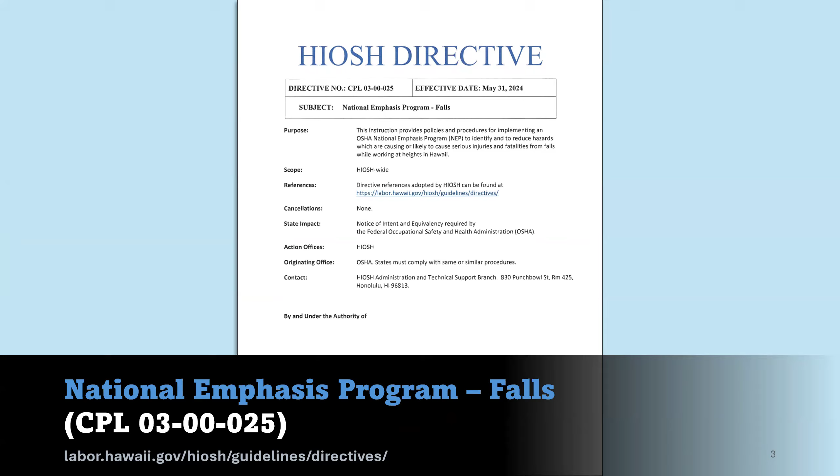Welcome to the Fall Prevention Fundamentals for General Industry and Construction. This presentation is provided under the authority of Section

396-4C of the Hawaii Revised Statutes, which authorizes our division to disseminate educational information to employers, employees, and the general public. Through lectures, exhibitions, and other forms of public outreach, we aim to raise awareness about the causes and prevention of workplace accidents and injuries.

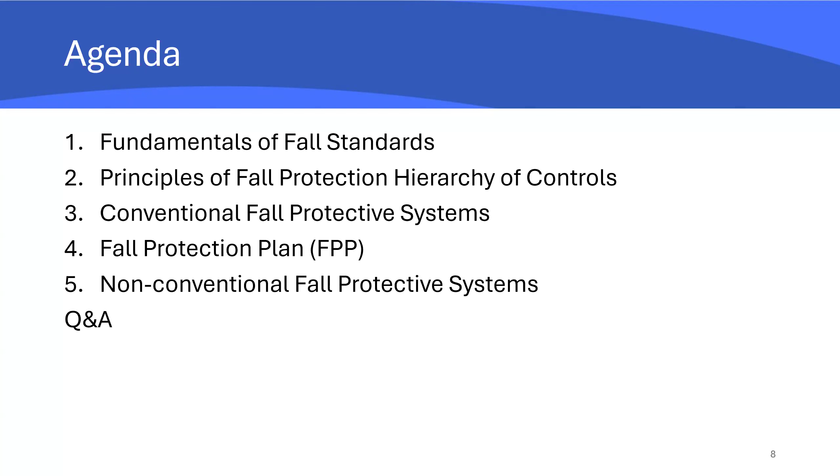Then we'll examine the non-conventional fall protection systems, focusing on when they may be used, what controls are needed, and how they fit into the overall strategies for managing fall hazards. Then a short Q&A at the end.

This presentation is designed with accessibility at its core, so my goal is to ensure that every participant, regardless of ability or background, can fully engage with the information being shared.

To support this commitment, I want to note in advance that I will occasionally read directly from the slides, and this is intentional, as some members of our audience may experience challenges with reading, vision, or other literacy related barriers. By voicing the content, we help create a more inclusive environment where everyone can follow along.

It's only when we can strengthen our community by supporting the people who struggle the most. Real progress begins when we notice who's being left out and make sure that they're included.

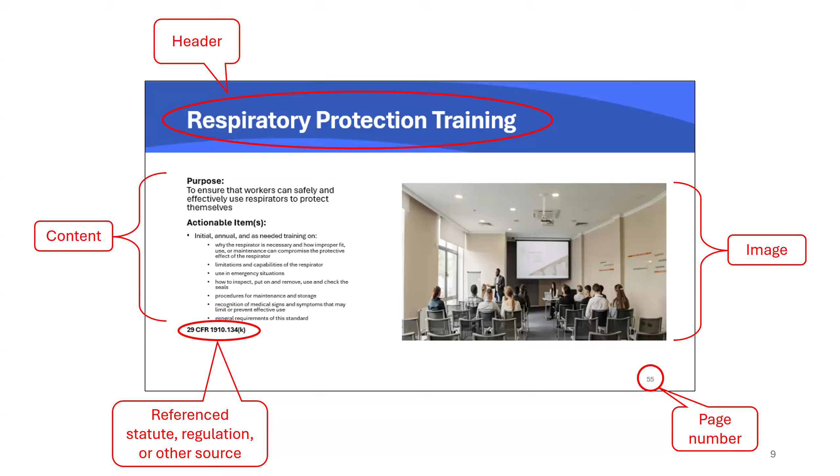Welcome to the fall fundamentals of fall standards. The remainder of this presentation builds on the employer's established training and procedures for protecting workers. Much of what follows should be familiar to those who practice this, but the goal is to reinforce the practices and expectations employers should already know and apply.

Are falls a problem? Absolutely. Across all industries, falls were the second leading cause of fatal workplace injuries. But in the construction industry, the picture is even more serious. Falls are the number one cause of worker deaths, meaning more construction workers lose their lives from falls than from any other type of incident. It's a clear signal that fall hazards remain one of the most critical safety challenges on job sites, and it underscores why strong fall protection practices, training, and planning are essential for keeping workers safe.

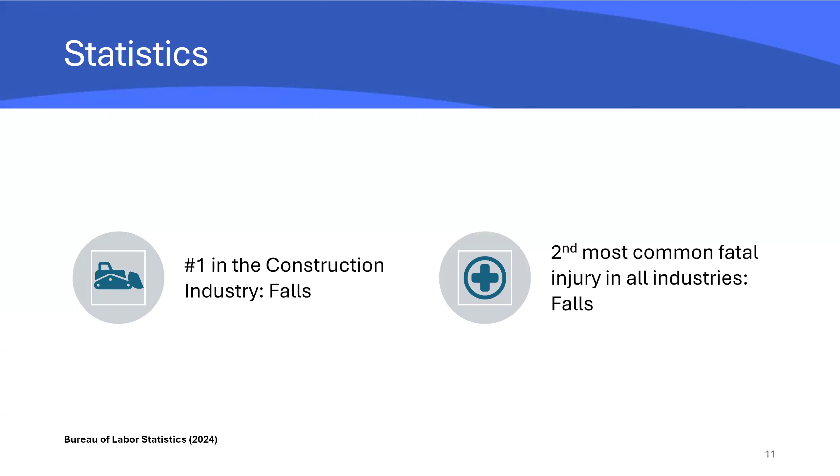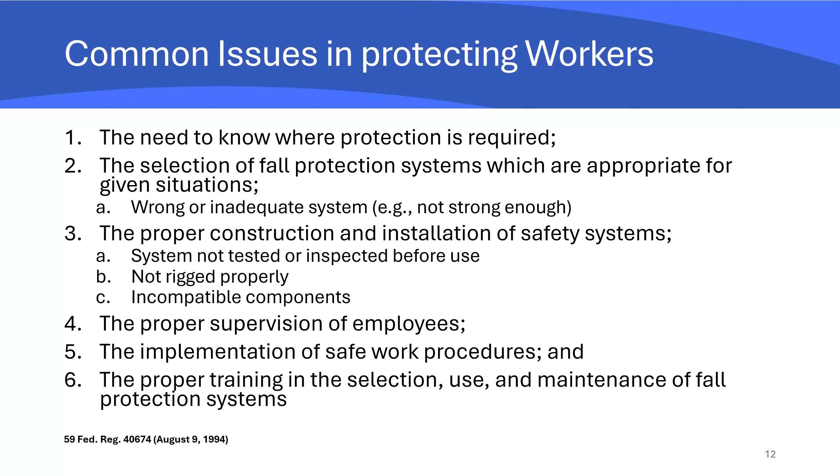Worker protection issues mostly came from human errors and equipment problems that created fall hazards, which the construction and general industry standards address. This includes where protection is needed to protect workers, how to select systems appropriate for situations, how to construct and install, how to properly supervise employees, how to implement safe work procedures, and training addressing the selection, use, and maintenance of the company's chosen systems. We're not able to address all of this within the hour, but I will address at least the first three.

These are the standards that address the common issues experienced by companies regarding fall protection, as I mentioned earlier. Notice the similarities in both standards, except for the personal fall protection systems detailed under section 1910.140 for general industry. There is a duty in both general industry and construction that examines where protection is required, and a selection process for fall protection systems. Criteria and practices address the proper construction and installation of the systems, as well as proper supervision. Finally, the proper training in the selection, use, and maintenance of fall protection systems is covered in the training requirements.

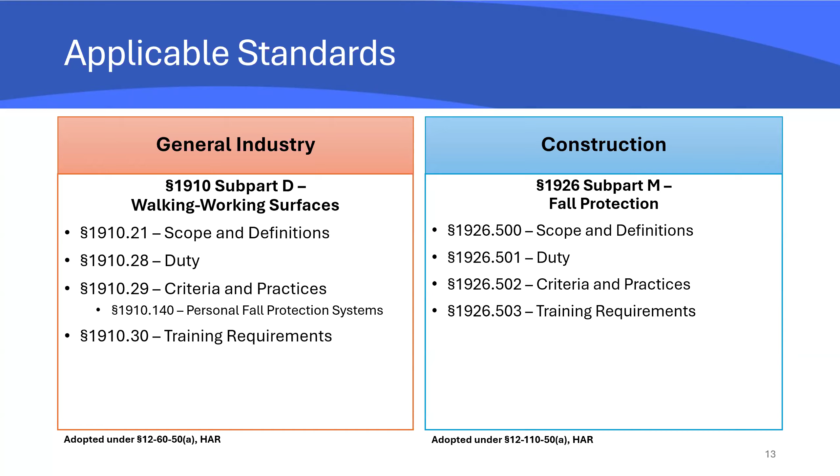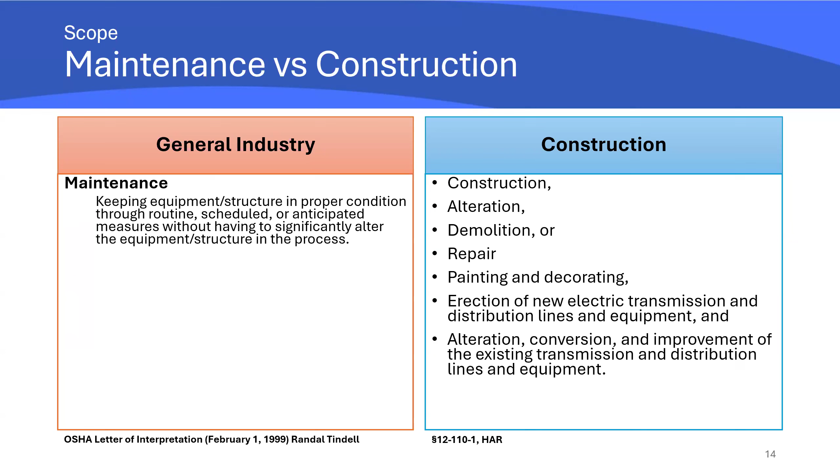Some tasks can fall under either general industry or construction, depending on what else is happening at the site. The simplest way to tell the difference is this: if the work improves or changes a structure or building, it's construction. If it preserves or keeps it in good condition, then it's maintenance and therefore falls under general industry.

As we talk about fall hazards, I'm referring to the threshold height that triggers the employer's obligation to provide fall protection. For general industry, it is 4 feet. For construction, it is 6 feet.

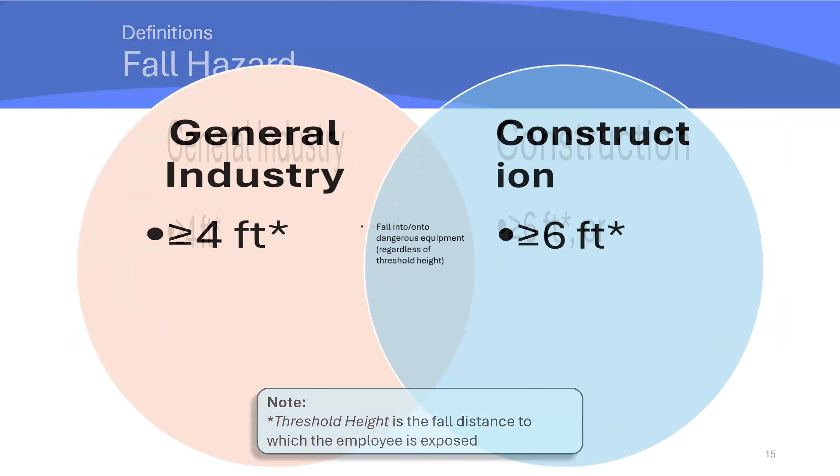The commonalities in the definition of fall hazard for general industry and construction include falling into or onto dangerous equipment, regardless of the threshold height. For example, that's like working 2 feet over machinery with open drive belts, pulleys, or gears, or open vats of degreasing agents or acid that can seriously burn an employee. So these are the things that we consider.

Both standards contain several exemptions. One I want to point out: in both standards, the exemption for fall protection systems applies to those performing inspections, investigations, or assessments before work begins or after all work is completed. Historically, insurance companies told OSHA during rulemaking that some tasks, like insurance inspectors, claims adjusters, and loss control personnel, should be exempt because requiring them to use fall protection systems would, one, increase risk by requiring them to carry and install equipment like rooftop anchors; two, prolong their exposure to fall hazards; and three, be infeasible when they cannot install anchors on buildings or structures they do not own, since those belong to their clientele. OSHA continues to agree with this rationale, as it reflects real-world inspection practices.

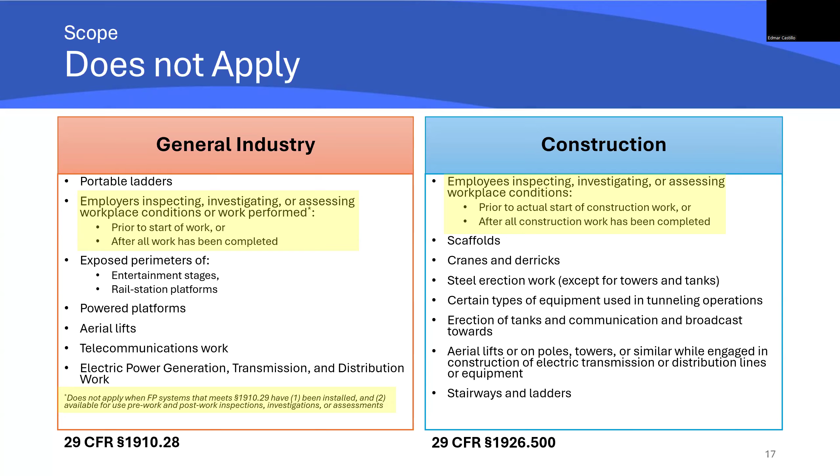Finally, we get to the application. In general industry, there are 16 situations where conventional fall protection is the default method, with a few exceptions. I'll explain conventional fall protection systems shortly, but it's important to note that although many requirements apply to specific areas and situations, item number 16 serves as a catch-all for any fall hazard not otherwise listed.

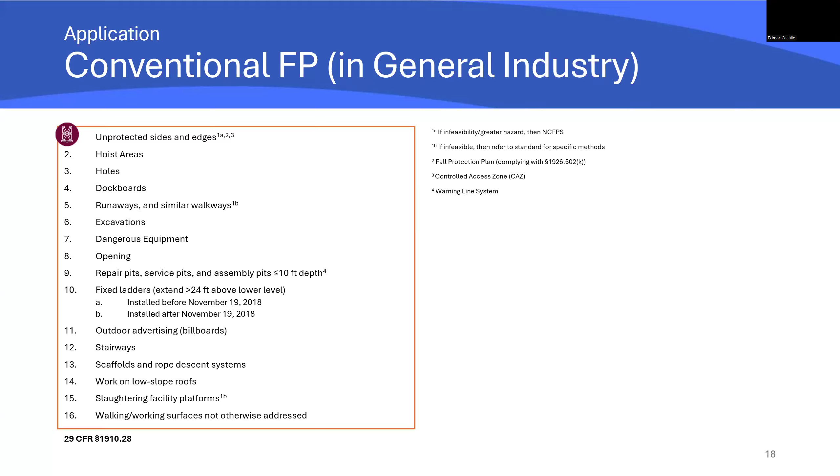Also notice the logo that we saw from our first slide denotes the applicable area where HIOSH cited general industry previously, which is unprotected sides and edges. In the construction standard for fall protection, there's about 15 specific situations, again defaulting to conventional fall protection systems with a few exceptions. The logo from the first slide denotes employers in the construction industry tend to have an issue in the residential construction listed here.

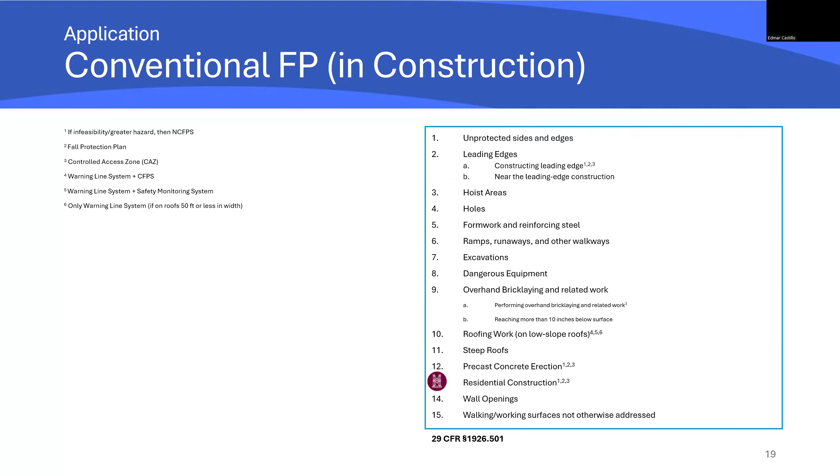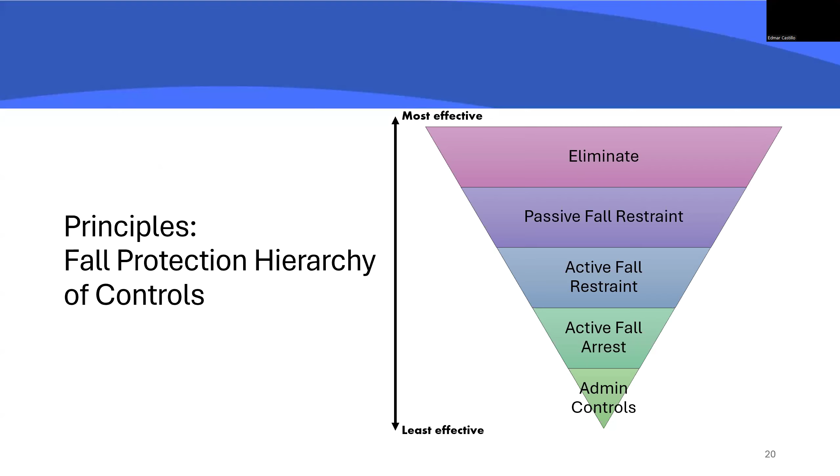Starting with the principles for fall protection hierarchy of controls, employers can learn and apply this layered strategy to design to prevent fall-related injuries by prioritizing methods from most effective to least effective.

Elimination is the most effective control, such that employers can redesign the work to remove the fall hazard entirely. An example would be bringing work to the ground level by removing the need for workers at height, like doing ground level assembly, constructing roof trusses, wall sections, or signage on the ground, then lifting the completed work into place with a crane.

Another example would be for painters to use long handled rollers for painting a residential home or cleaning tools from the ground instead of using a ladder. Another is using drones or camera poles for inspections. There are so many creative options available to employers without risking their workers to not be near an unprotected edge or side.

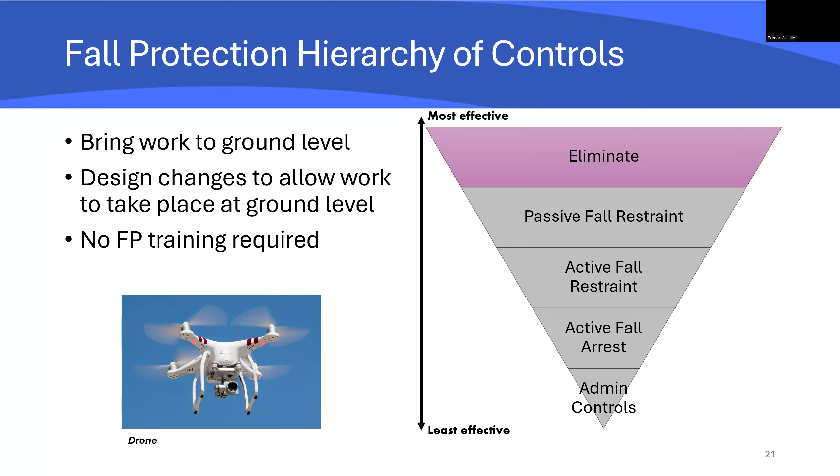Passive fall protection systems are protective measures that are fixed in place and don't require human interaction or involvement to serve their purpose. An example of this would be physical barriers like guardrails or parapets, safety net systems, those kinds of things.

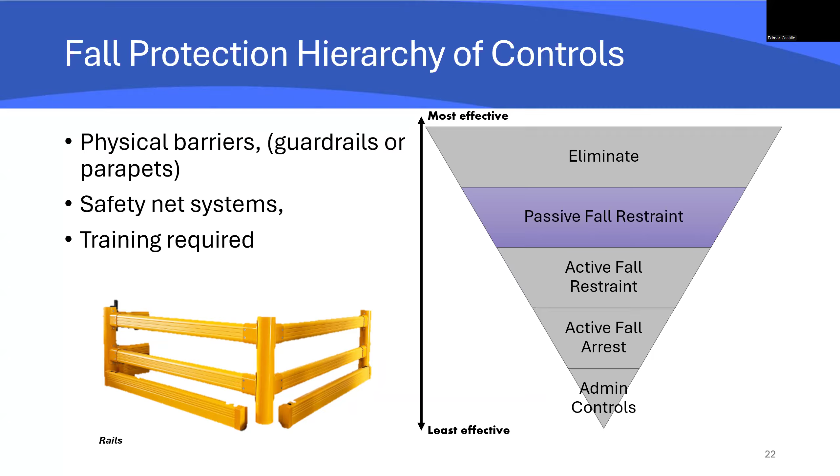Active fall restraint systems are those that restrict workers' movements, preventing them from accessing fall hazards. Essentially, it's like a leash on the worker from going further to the unprotected edge. This requires some level of worker participation, like donning body harnesses and connecting to anchor points on the rooftop.

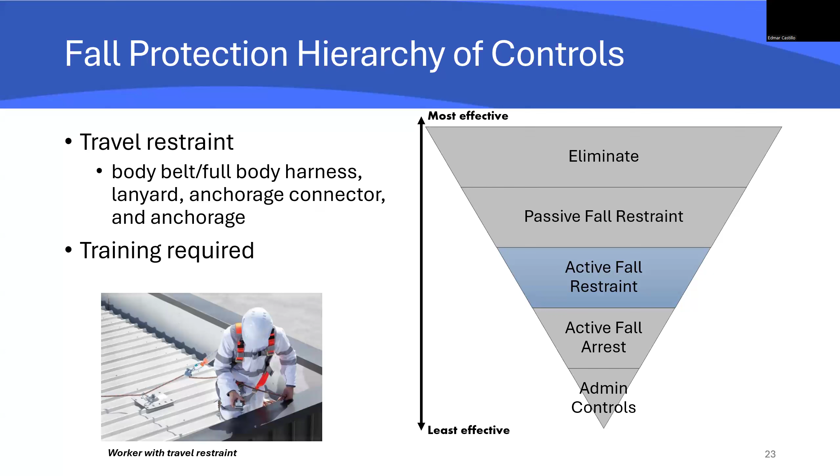Unlike fall restraints, fall arrest is a reactive system designed to safely stop a worker mid-fall, limiting the fall distance and impact forces and preventing them from striking a lower level. These are typically full body harnesses with shock absorbing lanyards.

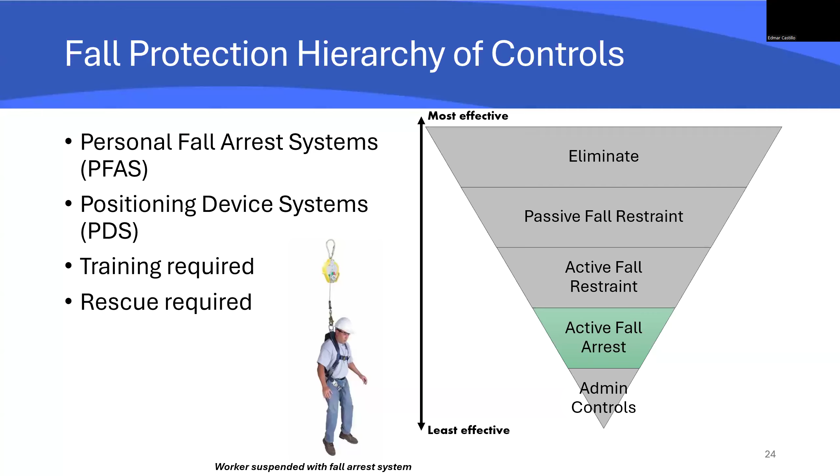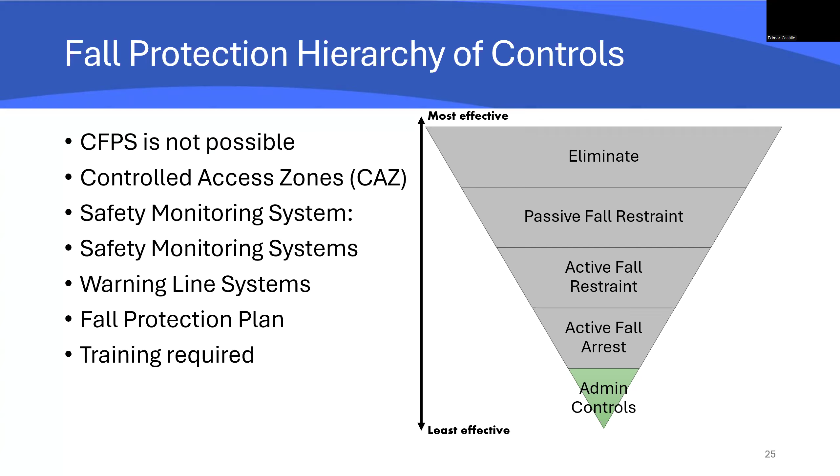Finally there are administrative controls. This is where measures are aimed at lowering the risk of falls. These are the least effective method because they don't really offer a physical or positive means of protection. That's where conventional fall protection systems are not feasible because of certain circumstances that I'll explain later in the slides. One will need to address it usually with setting up lines and stanchions or other alternative methods.

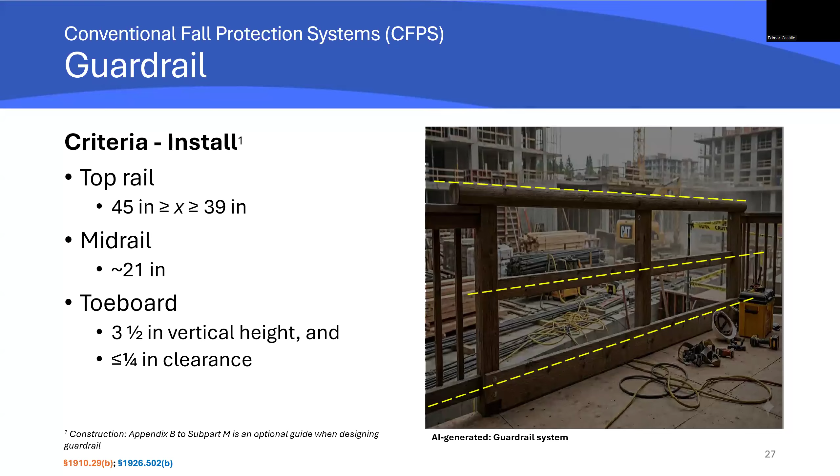I've been talking about conventional fall protection systems, and this is what it is. It's three areas, the first being guardrails. If you're choosing to create your own guardrail, there's specific regulatory criteria. The top rail must measure 42 inches plus or minus 3 inches from the walking working surface to the top edge of the top rail. In practical terms, the acceptable height range is 39 inches to 45 inches.

If you're wondering why 42 inches was chosen, it's because the center of gravity for most workers is around their midsection. Therefore, a critical factor for the top rail is that it contacts above workers' center of gravity, thus preventing them from pivoting over the guardrail. That's not a foreign concept for a lot of these trade industries because the International Building Code (IBC) and the International Residential Code (IRC) have similar requirements requiring a 42-inch guardrail.

Secondly, the midrail must be installed at a height midway between the top edge of the guardrail and the walking working surface. This tends to be about 21 inches if the top edge of the top rail is 42 inches. Finally, when installing the toe board, it must be measured 3.5 inches in vertical height with 1/4 inch clearance from the walking working surface. Also note that in Appendix B to Subpart M, there are about 5 types of railings and guidance that employers can consider using when designing a guardrail: wood, pipe, wire, rope, and structural steel.

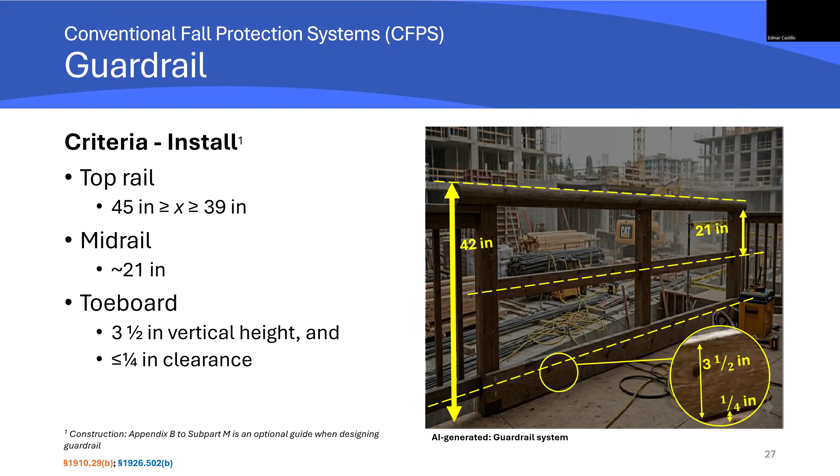When we want to test the strength of these railings, there are certain considerations. The top rail must withstand at least 200-pound force applied in any outward or downward direction at any point along the top edge of the top rail. This is because we don't want to deflect the top rail to a height of less than 39 inches above the walking working surface.

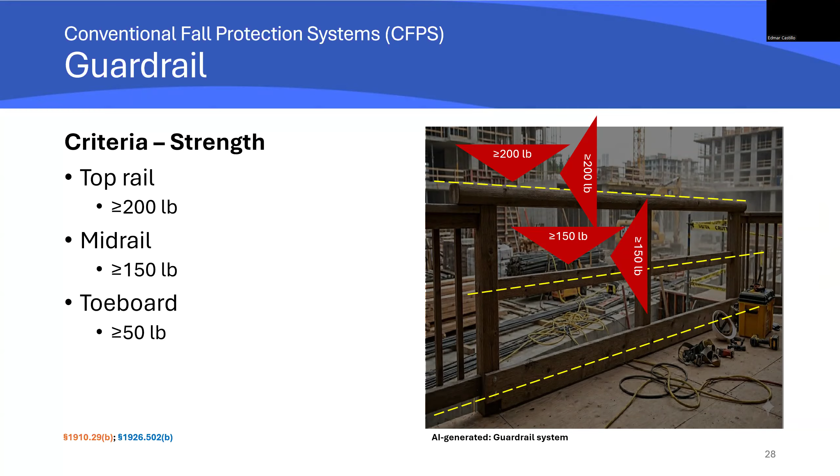You'll notice when you read the standard, it is indeed a performance-oriented standard. Therefore, the employer has the flexibility to determine how to test the strength of the railings. For the mid-rail, it's at least 150 pounds applied outward or downward, and at least 50 pounds for the toe board.

When guardrails protect employees from falling, similar barriers must also be used to prevent objects from falling onto workers below. These protective measures can include screening or mesh, toe boards, or solid panels installed from the top rail or mid rail down to the walking working surface.

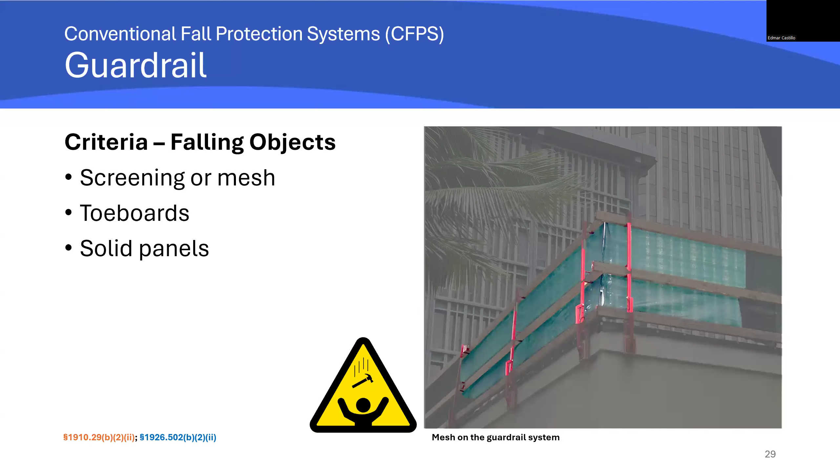If you're choosing to create your own safety net, know that there's also criteria that needs to be met. In general industry standard, the safety net reference refers to the construction standard, so a lot of the regulatory requirements come from that construction standard.

You'll want to attach the safety net as close as possible to the walking working surface, but never more than 30 feet below it. Also, when connecting the net close to the surface, the border rope, used to connect the safety net to the fixed object, must have a minimum breaking strength of at least 5,000 pounds. This is because when a worker falls, the force on the net is significantly higher than the worker's weight due to momentum.

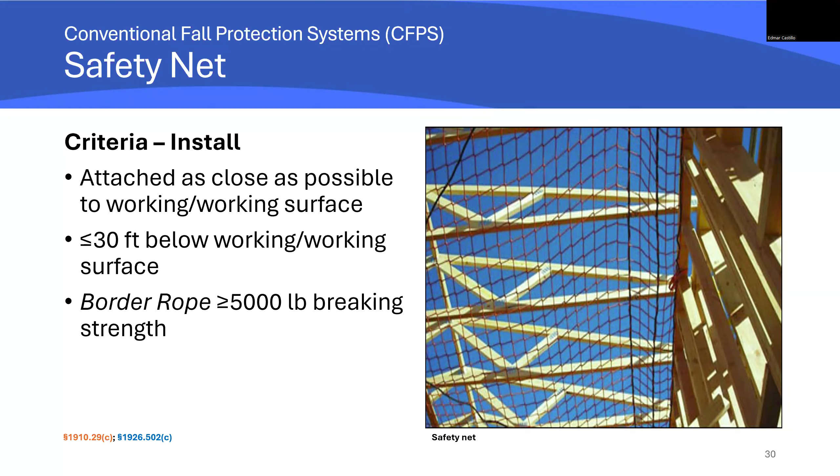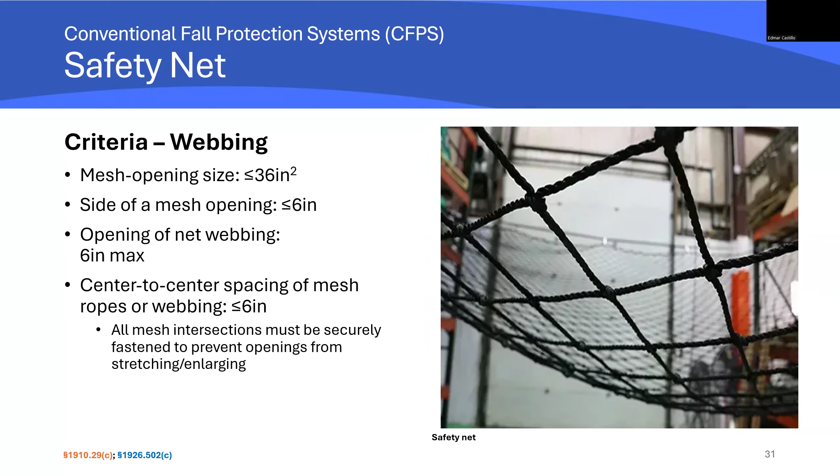It's also important to note the criteria for the webbing of your safety nets. The opening size of the net is the clear opening, or the holes between the material. Determining the opening size is important because it controls what stays on top and what falls through the net. The net openings in the mesh can't be larger than 36 square inches, and no single side of any opening can be more than 6 inches. The spacing between the ropes or webbing must also stay within 6 inches from center to center. Every point where the mesh intersects must be securely fastened so the openings don't stretch or get bigger during use.

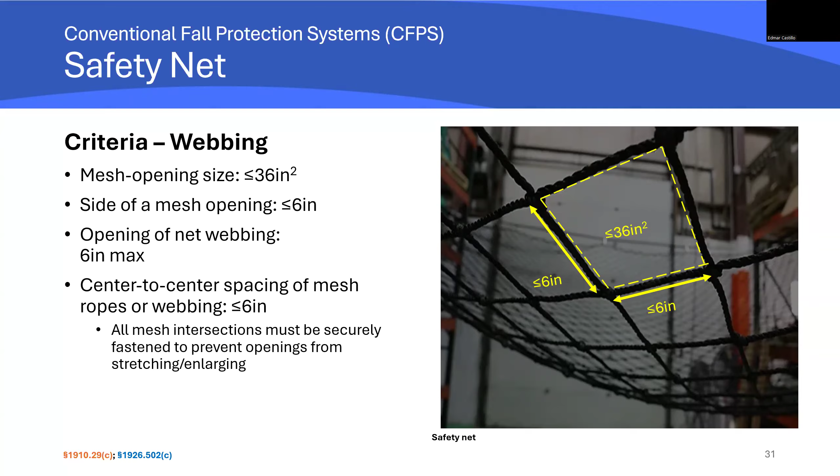Safety nets must extend outward from the edge based on the vertical drop. If the drop is under 5 feet, the net must extend at least 8 feet. For a 5 to 10 foot drop, the net must extend at least 10 feet. For drops of 10 feet or more, the net must extend 13 feet or more.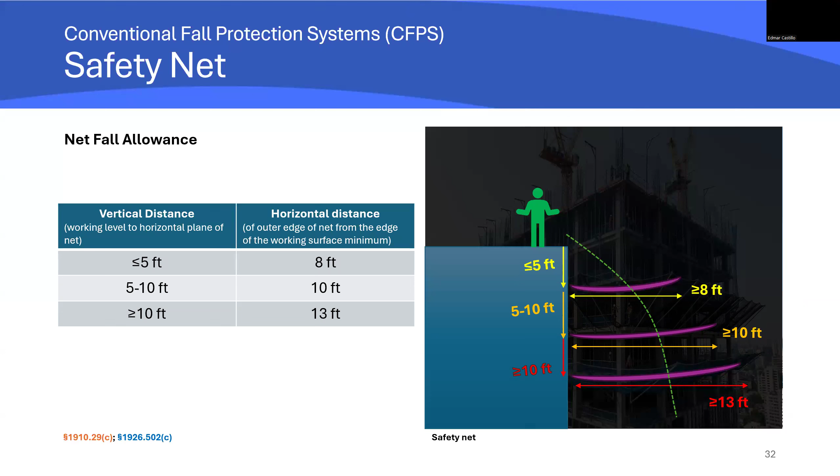Safety nets and safety net installations must also be drop tested at the job site at these frequencies: after initial installation and before being used, whenever relocated, after major repair, and at 6-month intervals if left in one place. The drop test consists of a 400-pound bag of sand, 28 to 32 inches in diameter, dropped into the net from the highest surface at which employees are exposed to fall hazards, but not from less than 42 inches above that level.

When the employer can demonstrate that it is unreasonable to perform the drop test, the employer or designated competent person shall certify that the net and net installation have sufficient clearance and impact absorption by preparing a certification record prior to the net being used as a fall protection system. The certification must include identification of the net and net installation, the date it was determined compliant, and the signature of the person making that determination. The most recent certification record for each net and net installation must be made available at the job site for inspection.

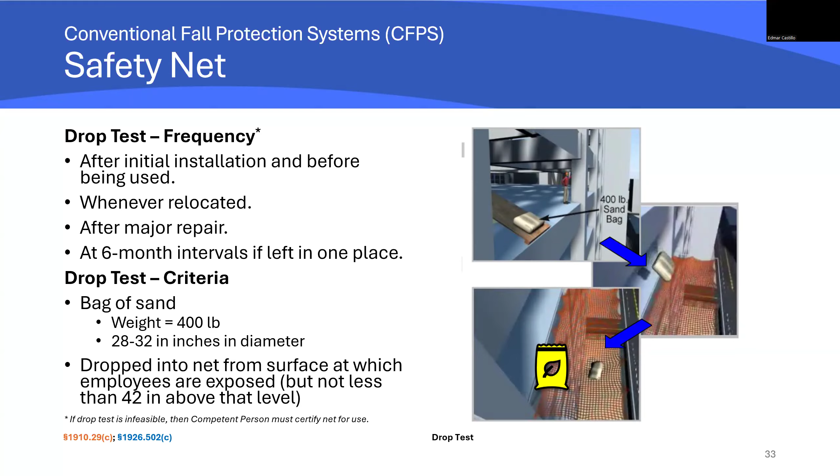Safety nets must be inspected for wear, damage, and other deterioration at least once a week, and after any occurrence which could affect the integrity of the system. You'll want to note possible deterioration caused by ultraviolet exposure if the net is installed outdoors, possible rot or mildew with the net. It might also be important to have flame retardant coatings on your net system, depending on your application.

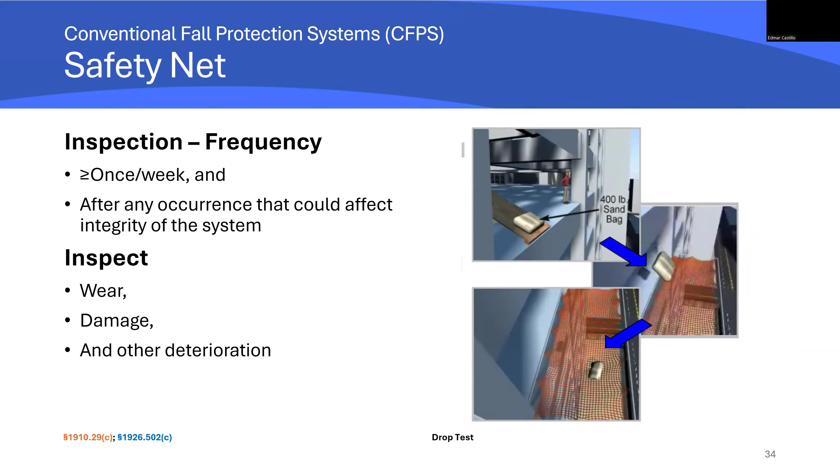There are several types of active fall protection systems currently available on the market, and probably more. Each varies based on the manufacturer and the specific applications an employer intends to address. I will not be covering these systems in detail during this session, because a thorough discussion would exceed our allotted time, and it's best suited for a separate session, which I anticipate offering next year through our webinar.

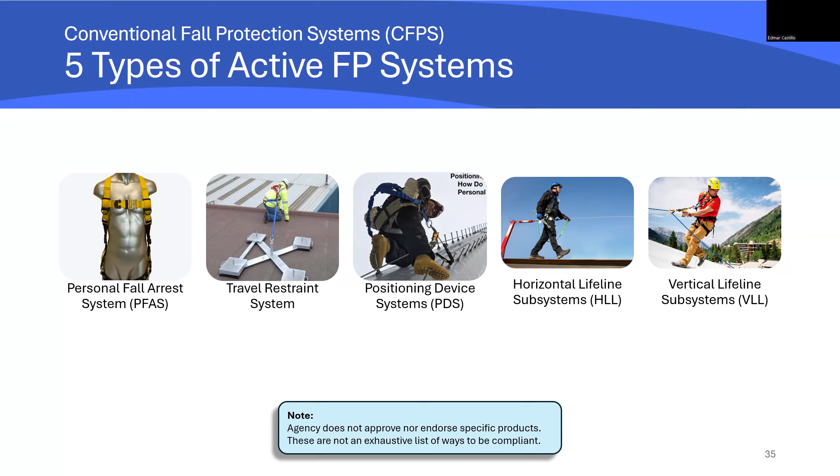Fall Protection Plan. The purpose of the fall protection plan is for the employer to document areas where conventional fall protection systems would be deemed infeasible or would create a greater hazard in specific situations or tasks, and therefore the employer must create an alternative method. In our area, we see employers skip to alternative methods without rationalizing and documenting whether they can even use it. I'll explain that in a bit.

The fall protection plan is required and is only found in, one, general industry standards where there are unprotected sides and edges, and two, in construction standards where it's found in leading edge work, precast concrete erection work, or residential construction work. Notice the logo from the slide, which refers to the most commonly cited items by HIOSH this past fiscal year. Also notice that in the general industry standard for fall protection plan, it relies on the construction standard when it comes to developing a fall protection plan.

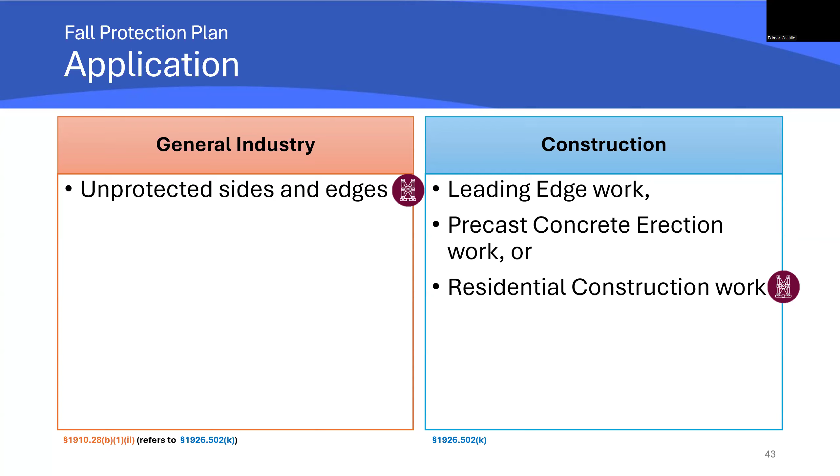To really hone in on this, it's important that employers follow the required decision-making process before using non-conventional fall protection systems. In other words, please don't skip this process, because the fall protection plan standard requires it.

First, you want to identify the applicable workers and situation. If certain situations or tasks apply, like what I mentioned previously, then move on to the next step. Second, determine if conventional fall protection systems would be feasible for your specific situation or task. Only if you can demonstrate that conventional methods are infeasible or create a greater hazard may you move forward.

Third, develop a written procedure of the fall protection plan, which I'll talk about in the next slide. Once these requirements are met, you may implement the non-conventional fall protection systems. Again, the most common employer mistake is bypassing number two and number three and going straight to the non-conventional fall protection without the required justification and documentation.

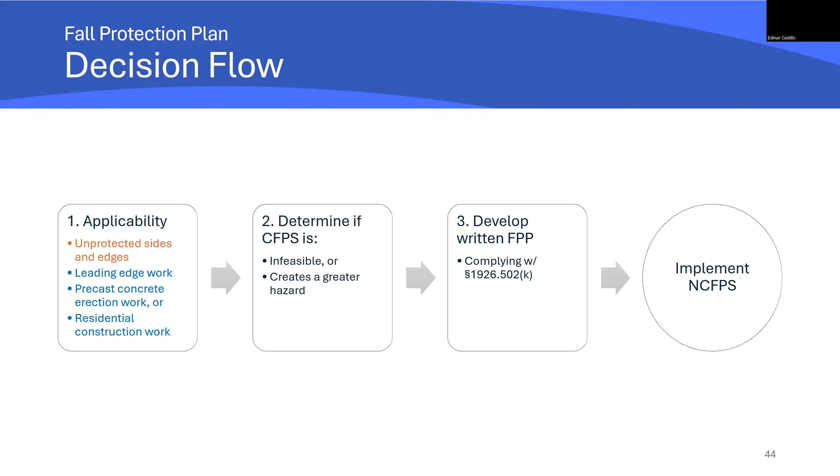To develop the fall protection plan is found in these categories. A written fall protection plan must be prepared by a qualified person. Quite simply, they have some expertise to solve this infeasibility with non-conventional fall protection systems, which the definition of the qualified person stems from the Hawaii Administrative Rules.

This plan must be for specific job sites, kept current, and updated only with that qualified person's approval, with a copy maintained on site. The plan must then be implemented under a competent person—that's simply one that has authority to identify hazards and correct them under the Hawaii Administrative Rules.

That includes supervision, including documentation of why conventional fall protection is infeasible or creates a greater hazard, and what alternative methods will reduce or eliminate the risk.

Controlled access zones, which I'll talk about in a bit, must be identified whenever conventional fall protection cannot be used, with compliance to the standard, section 1926.502G. A safety monitoring system if required, again I'll talk about that in a bit, and a list of authorized workers.

After any fall or near miss, the incident must then be investigated and the fall protection plan updated to prevent reoccurrence.

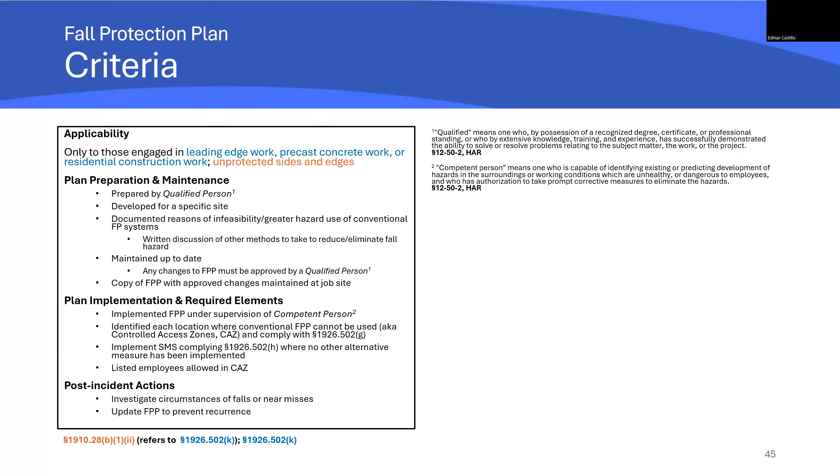Okay, so now we're on the non-conventional fall protective systems. I do want to note this is considered the last resort, not the default method, but the last resort, because OSHA determined that there is no safe distance from an unprotected side or edge of a walking working surface that would render protection unnecessary. This is important to note because, unlike conventional fall protection systems, these do not provide equal protection to workers.

So there are two types: designated areas and safety monitoring system. A designated area is a delineation, usually by lines and stanchions. A safety monitoring system is someone watching you and warning you, hey, you're getting too close to the unprotected side, or just crossing the delineated line, come back.

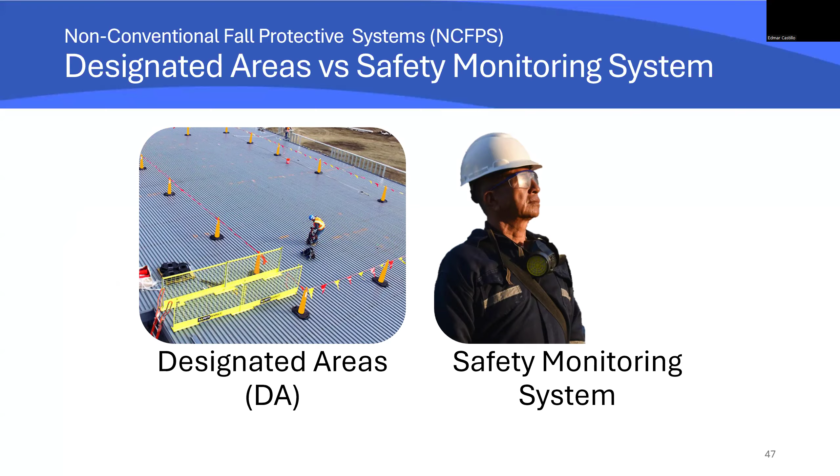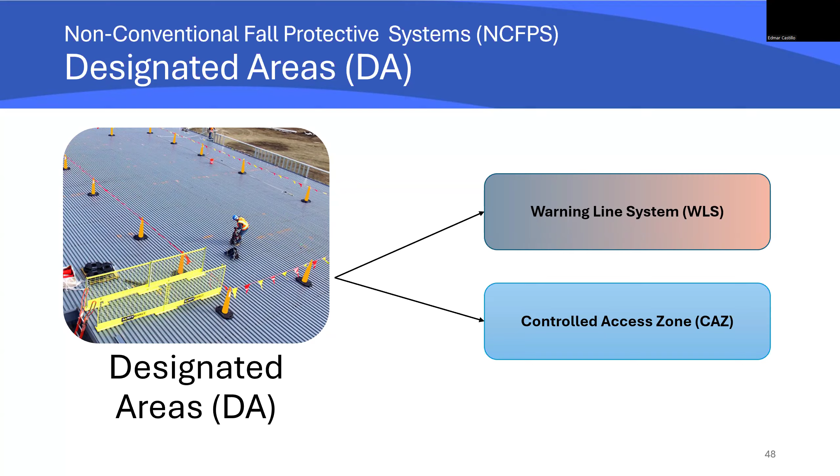Within the designated area, there's the warning line system and the controlled access zone. The difference between the two is simply that the controlled access zone is restricted entry—think of it like exclusive entry to a nightclub, you have to be on the list to get access. Versus the warning line system is a visual boundary; you can see the lines and stanchions to warn you if you're getting too close to that area of the danger zone.

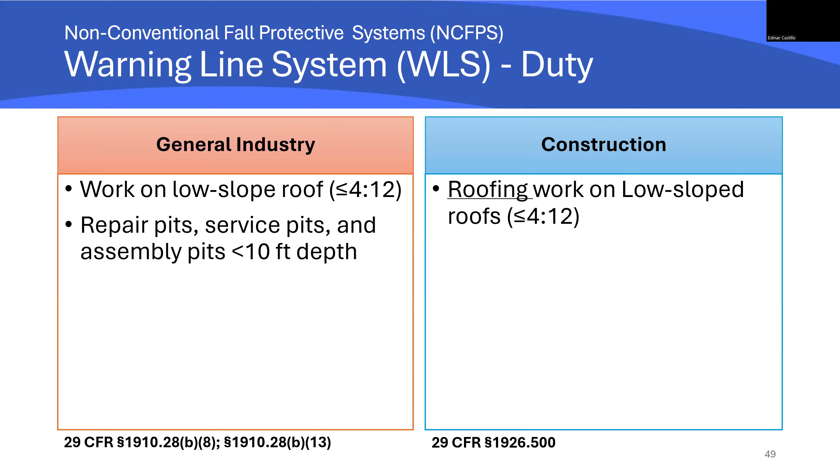So warning lines in construction are mainly used for roofing work on low slope roofs. A low slope roof is defined with a slope of 4 to 12 or less. In general industry, they're used on low slope roofs as well as around repair, service, and assembly pits.

In vehicle service and repair pits, the fall hazard is present only when a vehicle is not over the pit. Driving over the pit normally eliminates the fall hazard, and conventional fall protection systems may not work at service, repair, and assembly pits, mainly because guardrails interfere with vehicles over and away from the pit. The personal fall restraint systems prevent workers from reaching the area to perform work.

So the general industry standard required in these pits, if less than 10 feet in depth, since fall protection is not feasible, is simply: one, authorizing trained employees to enter within 6 feet of the edge; two, mark off the area at least 6 feet from the edge with the use of contrasting floor markings, warning lines, or a combination of both—I don't have that pictured here because it's hard to find a free picture for warning lines and floor markings; and three, post caution signs with the words 'Caution, Open Pit' to start.

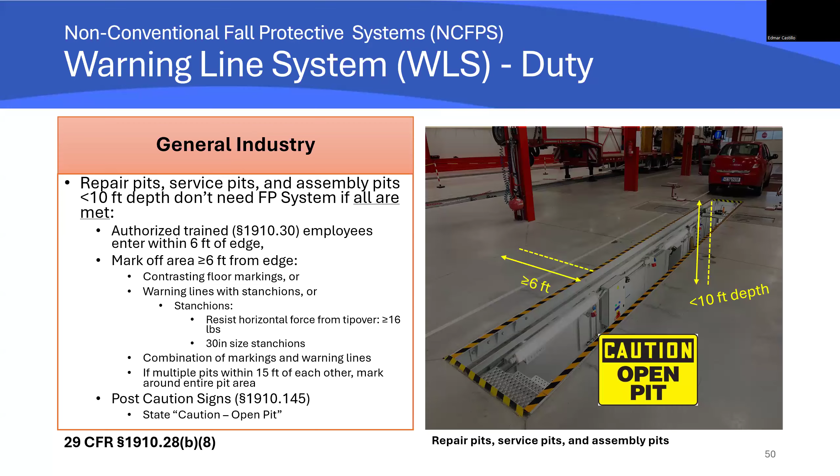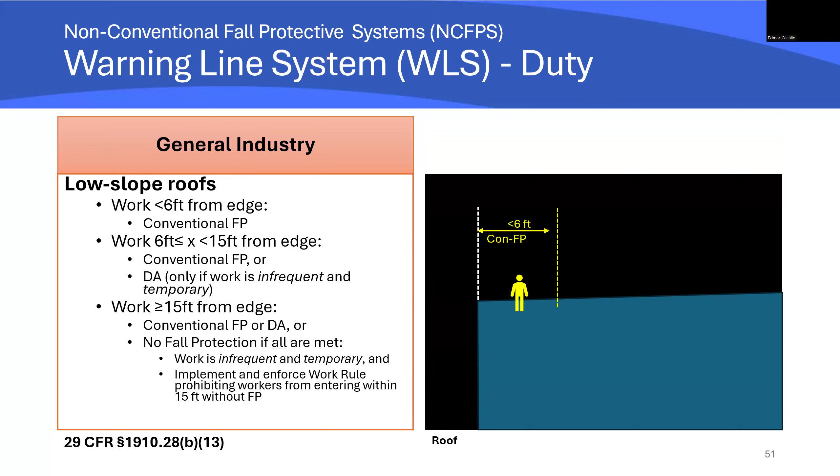Also, you would see designated areas in general industry are dependent on the distance of work relative to the unprotected low slope roof edge. When working on a low slope roof, workers within 6 feet of the edge must use conventional fall protection, like I mentioned previously.

Any one of the three: guardrails, safety nets, or personal fall harnesses. If they are between 6 to 15 feet from the edge, they can use either conventional fall protection systems or the designated area, but only when the work is both infrequent and temporary, which I'll explain shortly. At 15 feet or more from the edge, workers may also use conventional fall protection, the designated area, or no fall protection if work is infrequent and temporary and a work rule is implemented and enforced prohibiting workers from entering within 15 feet of the roof edge without fall protection.

And this mirrors closely the numerous feedback OSHA received regarding the construction standard on warning line systems.

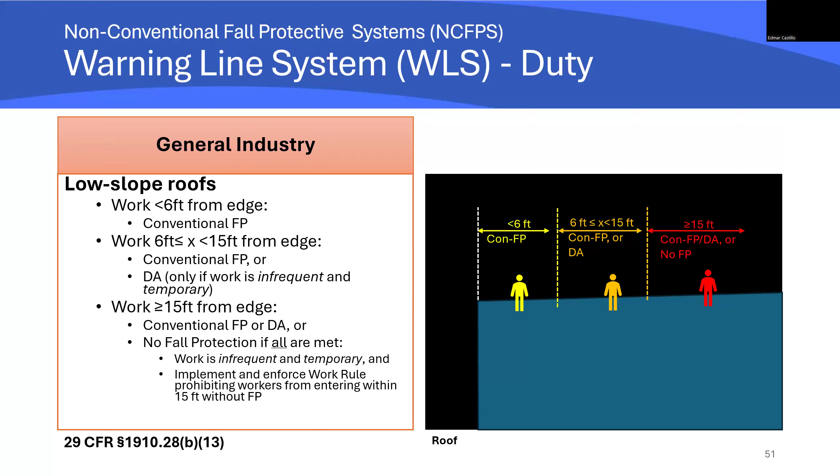Now, you might be wondering what infrequent and temporary mean and how they're defined. There's no regulatory definition. However, in the preamble to the standard - I'm sure since you're lawyers you already know what a preamble is, but for the record, it's detailed information about the background, purpose, and justification of regulations federal agencies promulgate.

Infrequent simply means a task done occasionally - monthly, yearly, or as needed - but definitely not daily or routine. However, if HVAC technicians, the people who do ventilation or AC work, have a primary duty of going to multiple job sites to perform simple tasks every day, they are still exposed to fall hazards daily and therefore do not qualify for the infrequent definition. The frequency is evaluated per individual worker, not per job site.

Likewise, temporary means short tasks that take less time than setting up the fall protection systems, or just less than 1 to 2 hours to complete a temporary task.

And if you recall, to use the exemption in the standard, the task must meet both conditions - infrequent and temporary. Therefore, if a task meets only one of these criteria, the employer cannot claim the designated area option for work performed 6 to 15 feet from the roof edge, nor can the employer claim that no fall protection is an option for work at 15 feet or more. In other words, at that category, the employer has to use one of the prescribed fall protection methods.

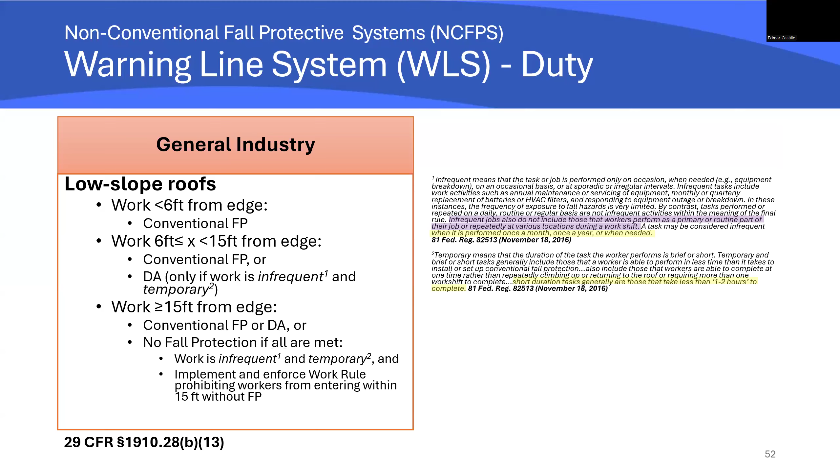So this chart is designed to help users determine which fall protection systems apply based on their work distance from the roof edge and whether the work is infrequent or non-infrequent, temporary or not temporary. As the chart moves from yellow to red, the red sections indicate situations where employers must apply greater scrutiny, especially if they intend to use a designated area or are considering working without any fall protection systems with a work rule, of course.

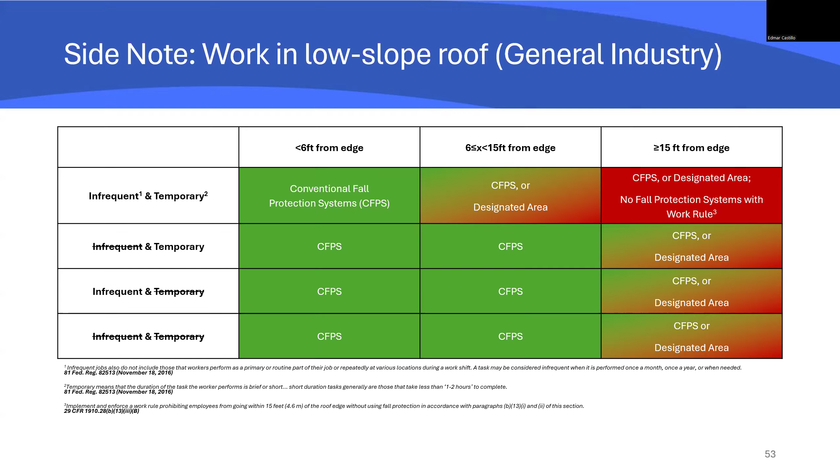Another side note - there's an important difference between what I mentioned earlier, the inspection exemption, and the no fall protection option for work on low slope roofs in general industry. While both situations may allow work without fall protection, they apply in completely different ways.

Under the inspection exemption, both general industry and construction allow workers to inspect the work site before work begins or after all work is completed without fall protection, because setting up fall protection would take longer and create more exposure to the hazard. However, this exemption does not apply in general industry if compliant fall protection systems are already installed and made available, like rooftop anchors and self-retracting lifelines.

However, the general industry's low slope roof standard allows no fall protection as one of the three options, but only when the work is infrequent and temporary, the worker works at least 15 feet from the edge, and there's an established work rule preventing entry into the 15-foot zone without fall protection.

These are two separate fall protection concepts, and it's important not to mix them up. We don't want workers to skip fall protection when it's required, misclassify the work task, or enter that danger zone without the safeguards necessary to protect them. The inspection exemption is for quick, low risk checks away from the edge, whereas the general industry low slope rule manages risk based on distance, frequency, and task duration.

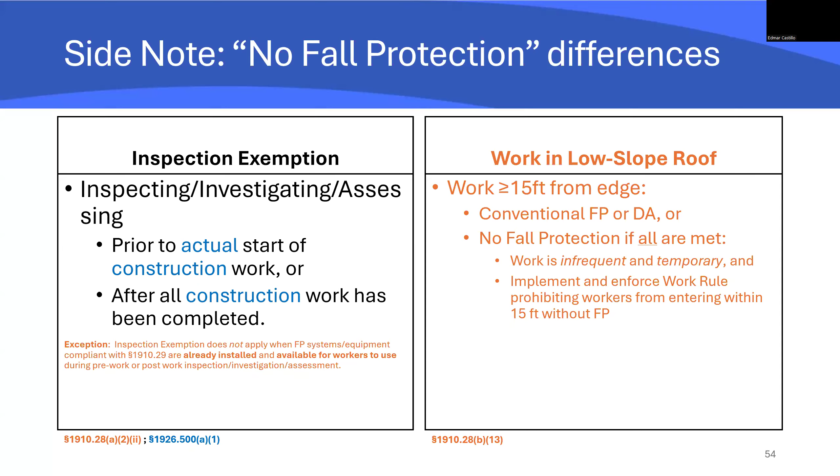In construction, warning lines are just for roofing work on low slope roofs. Roofing work is defined to mean hoisting, storage, application, and removal of roofing materials and equipment, including related insulation, sheet metal, and vapor barrier work, but not including the construction of the roof deck.

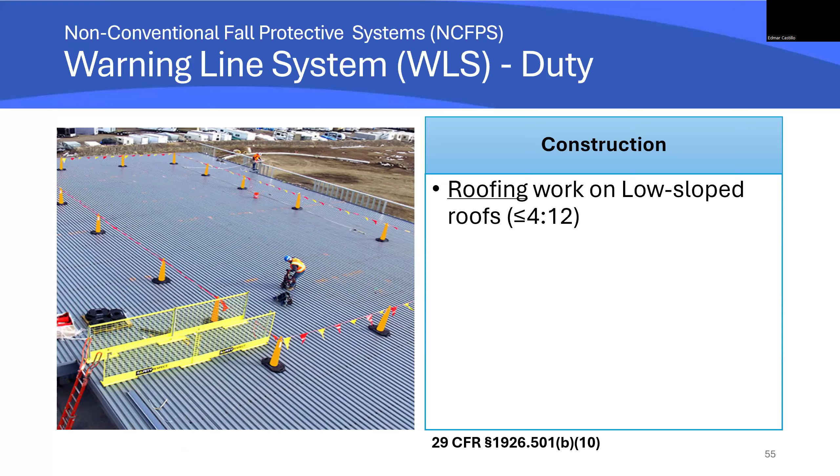A warning line system must use strong visible materials and must be set up so workers can clearly see and feel it as a boundary. The line must be made up of rope, wire, or chain and must have high visibility flags spaced no more than 6 feet apart. It must be positioned between 34 and 39 inches above the roof surface. The height is low enough to warn a short worker who's stooped over, while at the same time high enough to not be a tripping hazard.

The line must be strong enough to withstand at least 200 pounds of force, and at least 500 pounds in construction. The stanchion's supporting line must be 30 inches tall and be able to resist at least 16 pounds of horizontal force without being tipped over, since a worker might back into the line or approach it without paying attention.

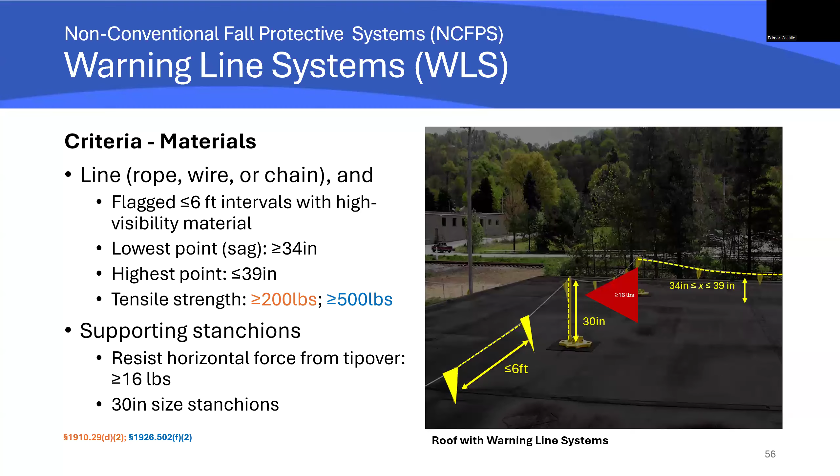When setting up a warning line system, it has to be installed around every side of the roof area, and the distance from the roof edge depends on whether mechanical equipment, or ME, is being used. ME includes any motor or worker-powered wheeled equipment used for roofing work, except wheelbarrows and mop carts.

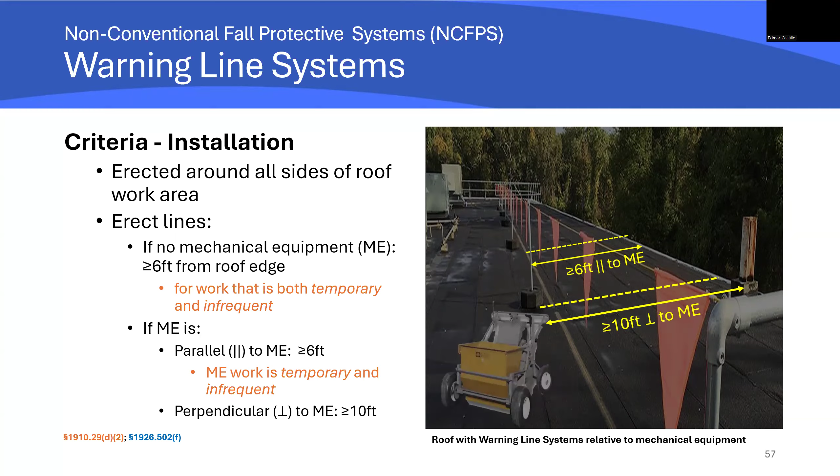We focus on ME because the highest risk occurs when the equipment is turned around. Workers often shift their attention away from the edge and make awkward movements, sometimes stepping backward toward the edge while trying to reposition this heavy, clunky machine. The required 6-foot and 10-foot distances are designed to give workers enough time to notice the warning line and stop before getting too close to the edge, which is especially important in roofing where workers may move backwards while applying materials.

If you're wondering why wheelbarrows and mop carts are excluded from the ME definition, it's because they don't require backward movements, are lightweight, and don't build up momentum. So they don't really pose the same level of risk as these heavier equipments like the felt layers or gravel buggies that you see pictured here.

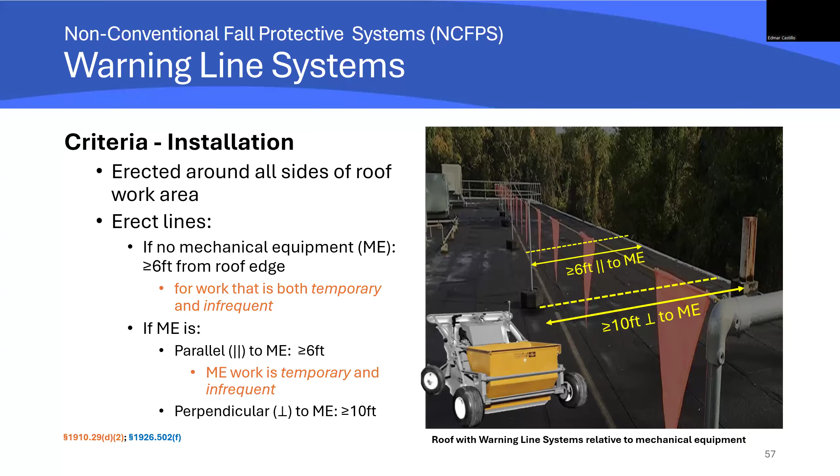Controlled Access Zone, or CAZ, is defined as an area in which certain type of work may take place without the use of conventional fall protection systems, and access to the zone is controlled. That's the exclusive nightclub where you have to be on the list to enter. You will only see CAZ used in conjunction with a fall protection plan in specialized construction work like overhand bricklaying, leading edge work, and residential construction work.

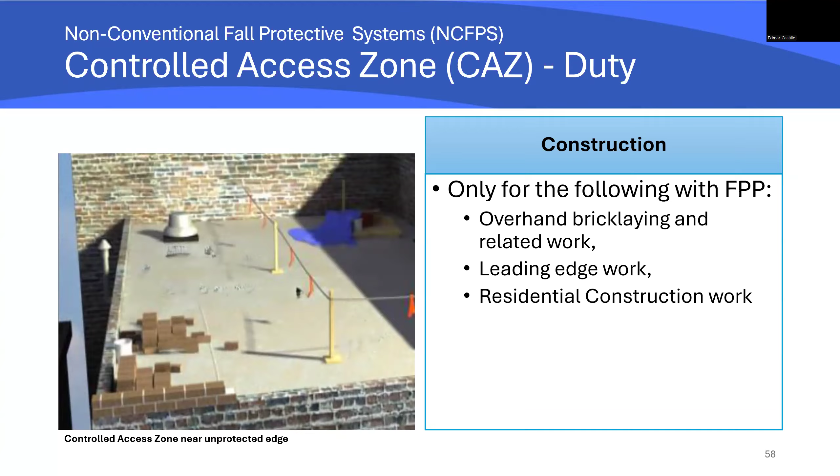The criteria to install CAZ is similar to warning lines, except the difference is the highest point of the control line must be no more than 45 inches from the walking working surface, as opposed to 39 inches, or 50 inches for overhand bricklaying. Another important thing to note is that CAZ can be connected to either a guardrail system or a wall, whereas the warning line system is all around the sides of the roof.

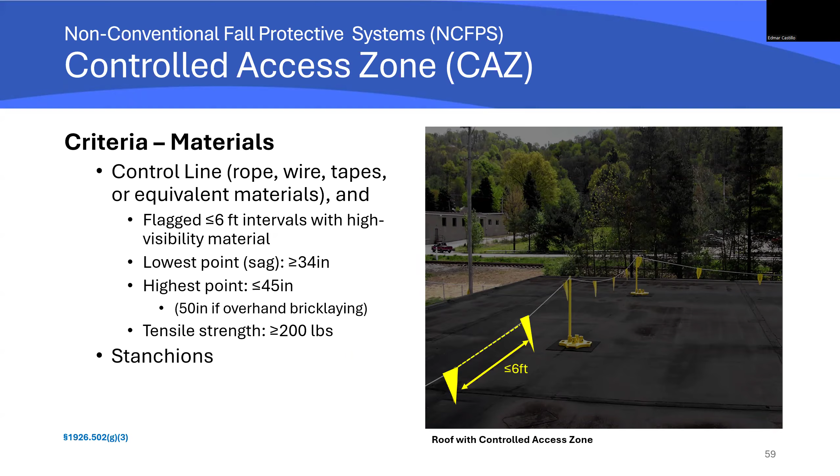I do want to remind that all workers working outside the CAZ must be using conventional fall protection systems if exposed to fall hazards. As the CAZ moves forward as the work progresses along the leading edge, it exposes unprotected sides and edges perpendicular to the leading edge. The fall protection is necessary, especially when two groups of workers are working on the same level, and one group is working in a CAZ and the other group is being protected by conventional fall protection systems.

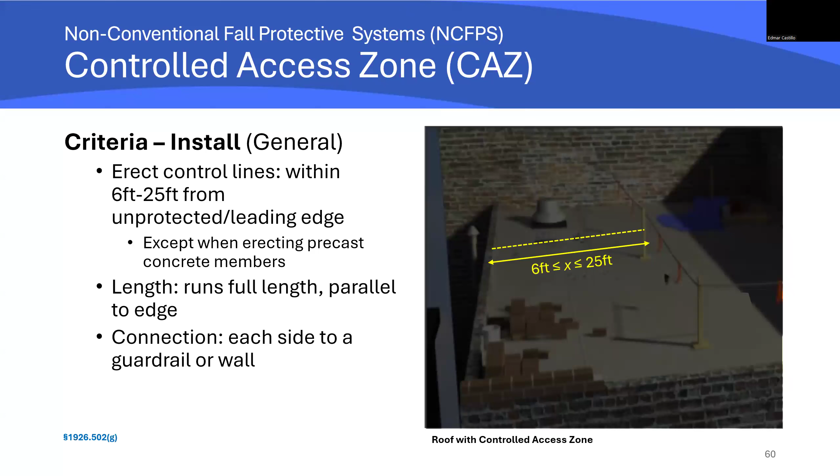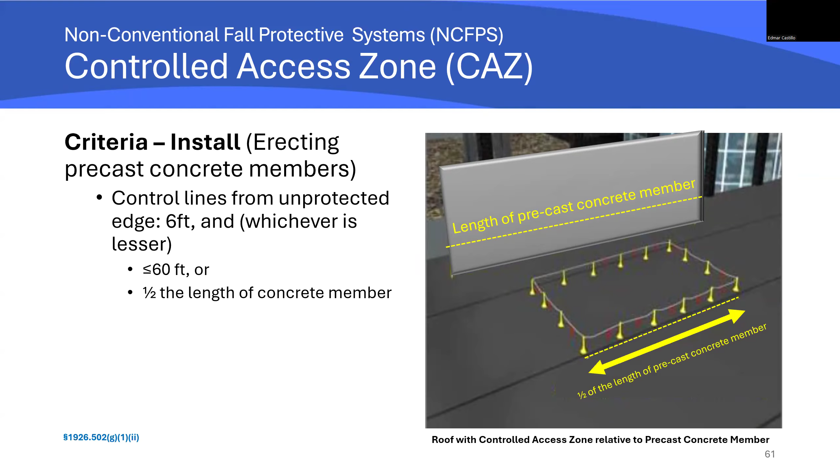However, for the erection of precast concrete members, the CAZ line must be no closer than 6 feet, no farther than half the size of the precast member being erected, to a maximum of 60 feet, whichever is lesser. This exception exists because sometimes it is necessary to turn a precast member, which may be as long as 120 feet, and if the control lines are too close, they could become entangled or uprooted as the concrete member is being positioned. So if a precast concrete member is 40 feet in length, half of 40 is 20 feet, which is indeed lesser than 60 feet.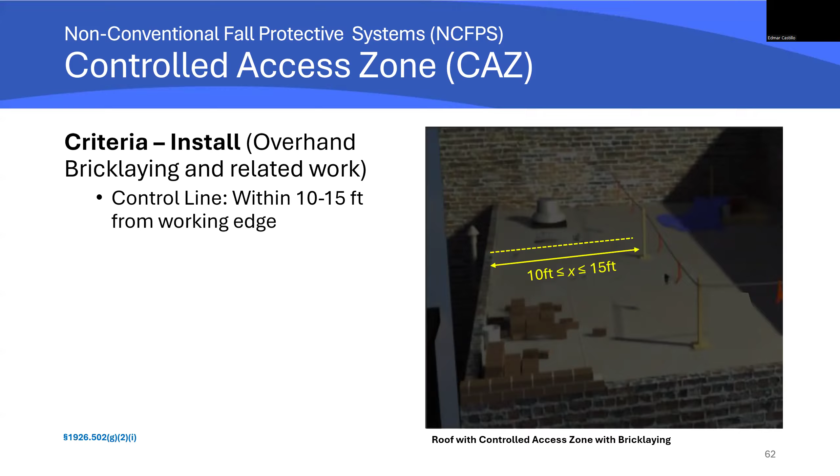CAZ for bricklaying and related work is within 10 to 15 feet from the unprotected sides and edges. This number was established with extensive review with industry and union representatives, to provide overhand bricklayers with an area free of interference from other employees not performing the overhand bricklaying and related work from being in the CAZ.

A safety monitoring system is a verbal warning system. If you recall, the warning line system is visual, safety monitoring is verbal. They will yell at you. The safety monitoring system uses a competent person as a safety monitor who has the authority to warn workers that they're getting too close to the unprotected sides or edges, or crossing the delineated line.

The competent person must be able to stay on the same level as the workers he's watching, maintain visual contact, be able to communicate orally to nearby workers, and only watch workers and not have any responsibilities. You are strictly watching the workers that you're supposed to be watching. You cannot do any other work or be distracted by any other work because your only job is to watch employees from crossing the line.

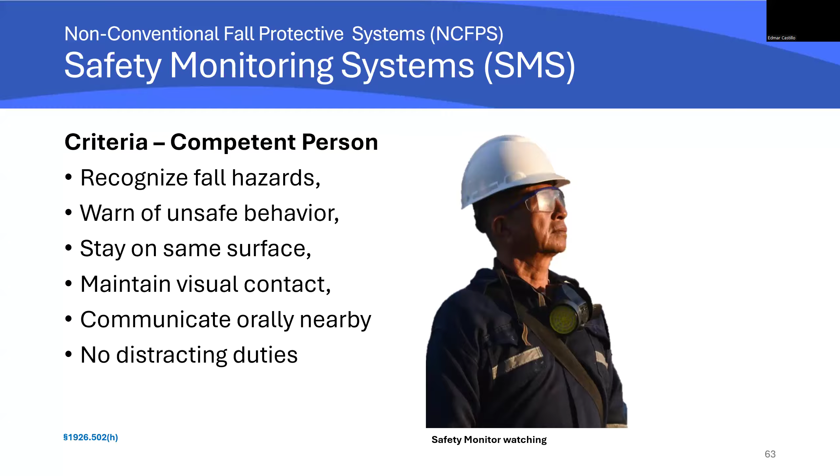Another consideration when using safety monitoring systems is, like I talked about for mechanical equipment (ME), while you're using the safety monitoring systems, you can't store or use ME for roofing work on low slope roofs. Two, OSHA believes that the presence of extraneous employees in these areas can interfere with work procedures necessary for the effective use of safety monitoring systems.

Again, the main job of the safety monitor is just to watch. Any other people might divert their attention away from what they were supposed to do. And three, those permitted to do work in safety monitoring systems areas must comply with the directions from them to avoid fall hazards. In other words, listen to the safety monitor. They're the competent person. They will yell at you if you get too close. Obey what they say, okay?

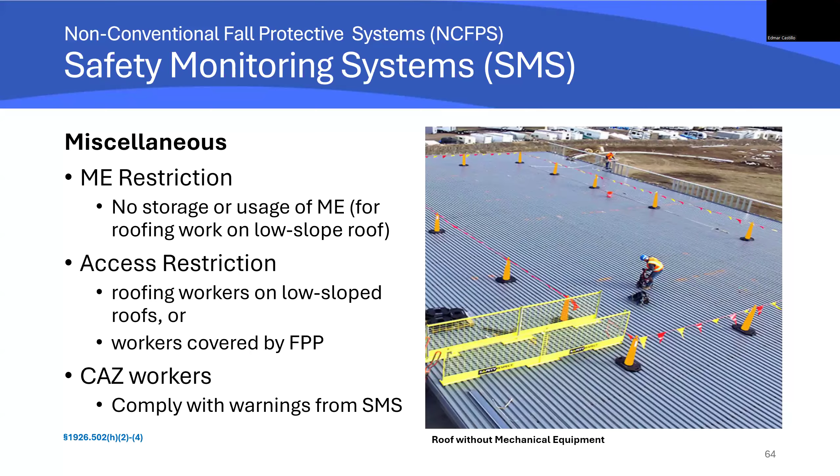And that is fall protection fundamentals in a nutshell.